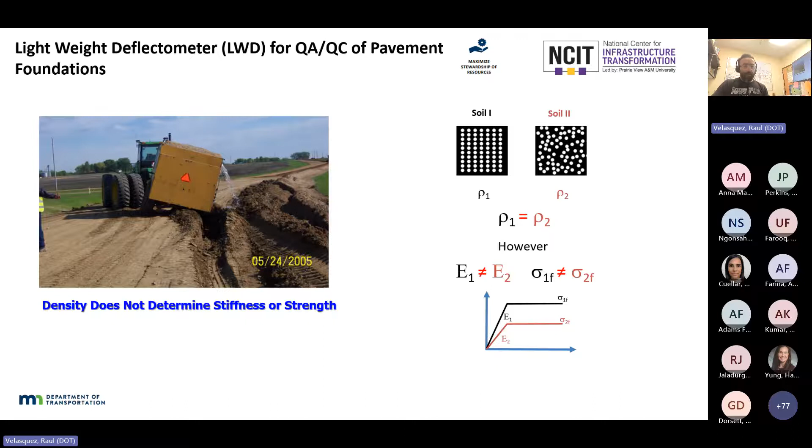Keep in mind that the work done for implementation of LWD was done by many other people before me, some of whom are already retired. I'm just here presenting the results on their behalf - all the amazing work done by my coworkers and previous staff from MnDOT.

So for compaction compliance, after extensive research, we modified specifications for quality assurance of your pavement foundation, which includes your base, sub-base, and subgrade.

So what do we have for compaction compliance in MnDOT? We have specified density, which includes Proctor tests, moisture, sand cone, and nuclear density - the classical old-school tests you do to check your material. We also have quality compaction, related to engineer judgment and experience - visual inspection of your foundation as it's built. Then we have DCP penetration index testing, highlighting the LWD, and test rolling.

For the LWD, during the research development process, there were two methods to assess performance: deflection based and modulus based. We developed charts and parameters so that according to your gradation and moisture content, you have a limit for specific situations and materials. For deflection base, we listed limits for how much deflection we allow.

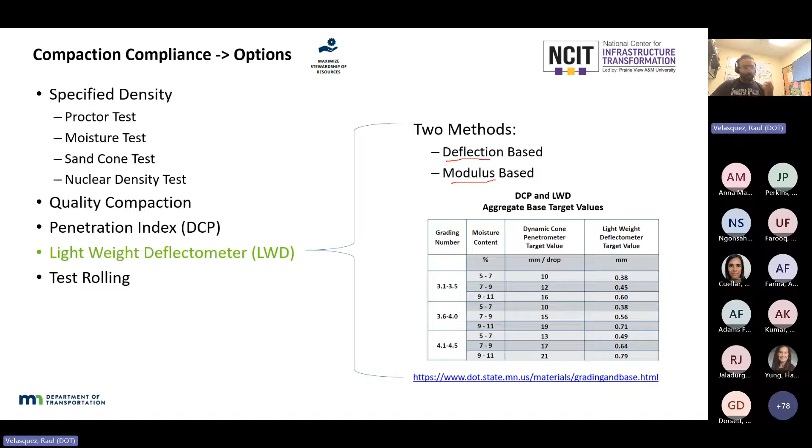However, we noticed as we tried to implement this research that it was a little tricky. Engineers and technicians are used to more rounded numbers, so values like 0.38, 0.71, 0.56 are kind of hard to absorb and comprehend. It was easier to move into modulus base - we have a better grasp of numbers related to stiffness. So we encourage our materials and soil engineers across Minnesota to use modulus base. We still have the option of using deflection base, but we mostly use modulus base.

After many years of testing and experience, we came out with minimum values for elastic modulus based on the LWD - for granular material, clay or clay loam soil, or base or reclaimed material, these are the stiffnesses we target in megapascals. It's pretty straightforward, and so far we've been pretty successful. These numbers match the performance well - we haven't seen any major failures with respect to this simple specification for quality assurance.

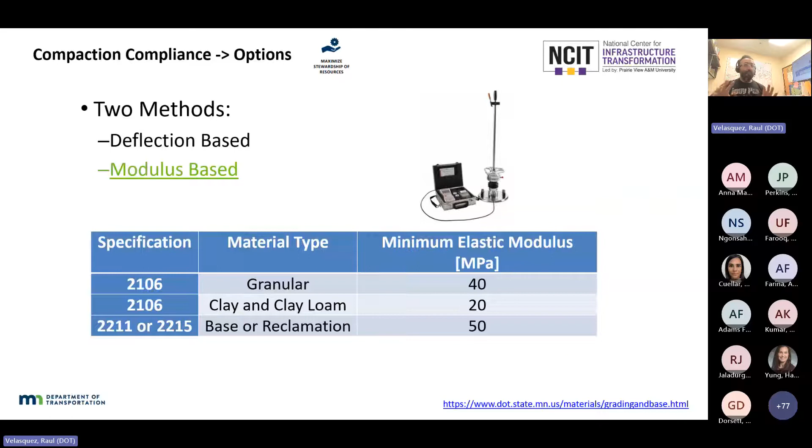So early on during the implementation of this technology, we'd have very few districts using it. Just to give some background, we have 8 districts across Minnesota in MnDOT, and we, with the Office of Materials and Road Research, are part of central office in Metro. We provide technical support to all districts.

Through this implementation process, we also got lucky because manufacturers started miniaturizing the LWD. One of the main issues for implementation was the super heavy device. Some of you probably have experience with it, carrying that. We used to have 2 people carrying this big device to go test it out in the field. So the miniaturization of this device made things much better.

And now we have kind of an exponential use. This chart shows about 22 LWDs all across Minnesota, and I think that number is pretty old. I believe we have way more LWDs now being used.

Some results coming out of the research we completed are the testing constraints. LWD cannot be used when the embankment thickness is less than 1 foot, when your base or reclamation thickness is less than 4 inches, or when you are testing within 3 feet of the water table. That's very important to know as a restriction.

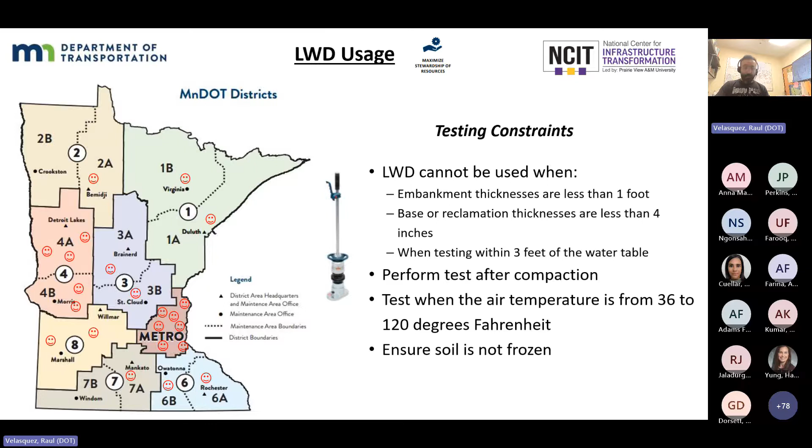One of the objectives of doing this LWD research was to move away from densities. We wanted to avoid the disconnect between the design specification and the construction quality assurance. We wanted to highlight the importance of fundamental engineering properties such as stiffness and strength, and use that to connect with our ME-based design.

We also wanted to be able to better quantify alternative materials. Using just density and classical tools wasn't good enough to really check the performance of innovative materials. And we wanted to be better at rewarding good construction. This tool does a much better job for us than the previous standard technology.

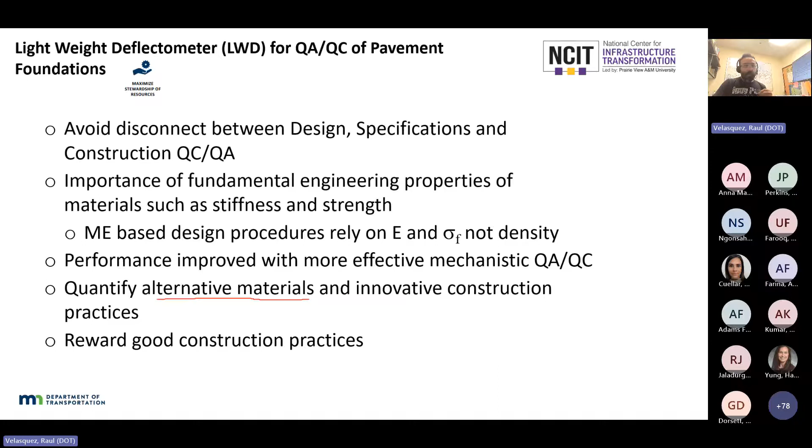So that's it with respect to the simple LWD technology. Now I'm going to move into a little bit more complicated topic, which is assessing stability of slopes across our interstate highway system.

First, I'm going to go through a tool we developed for assessing the vulnerability of slopes based on geomorphology. And what I mean by based on geomorphology is based on assessing the shape of the land. Let me give you some context and examples of why this matters.

Extreme events are becoming more important for us, and why these research projects are super important for MnDOT. Here's an example of what happened in 2012. We had an extreme rain event season in June 2012 that caused major slope failures across Minnesota.

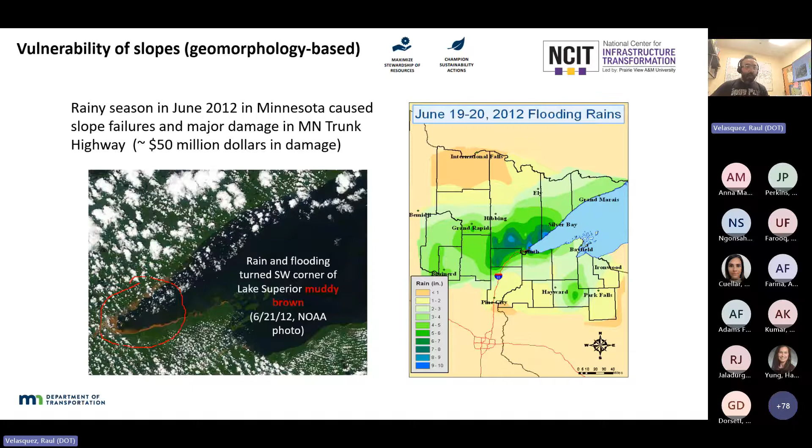It cost about $50 million in damage to repair. You could see even from satellite the damage that occurred. During the rain and flooding, the southwest corner of Lake Superior became muddy and brown. You can see how massive the event was. On June 19 and 20, we had intensity rains of between 7 to 8 inches where we had all these major failures. That just gives you some context of how important this is for us in Minnesota.

This is a photo, an example of one of those failures. Jay Cooke Park, a super popular place to go hiking and vacation with family, had a major failure. We had about 26 road closures on our Trunk Highway system after this event.

It was a major team effort. We had many agencies working together - MnDOT, DNR, DPS, local law enforcement, federal highway, consultants, contractors - working as a team trying to solve and fix this as quickly as possible to get the system back online.

MnDOT's main damage areas were Trunk Highway 210 in Jay Cooke, Thomson, Trunk Highway 23 in Fond du Lac, and Trunk Highway 2 from Proctor to I-35. Those are the major failures that occurred.

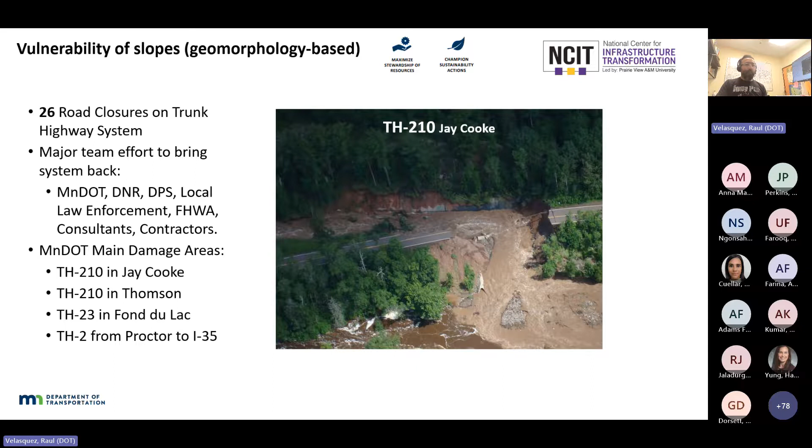That's why it's super important to have a tool that can help us assess the potential problems we have and be proactive about it. That's why we completed this project. We hired WSB as a contractor to help us. The idea behind this geomorphology-based tool for assessing slope stability is to assist engineers to proactively identify and mitigate slope risk along the interstate highways and help during project scoping.

During that planning stage I showed you earlier, in that cycle and long range planning, leadership and planners have to decide how much money to put in 20, 30 years from now so they can proactively start mitigating some of these risky zones. That's part of their long range planning. They've used this information to better estimate budget allocation for the future, and we also use this project to enhance our risk-based assessment of our assets.

In summary, this tool uses a geographic information system, a GIS model, based on geomorphology, the shape of the land, and other key geological and geotechnical parameters to provide a vulnerability rating or probability of failure. This model uses geographic weighted regression, or GWR, to account for local variation in key parameters and minimize bias and uncertainty in the assessment of probability of failure.

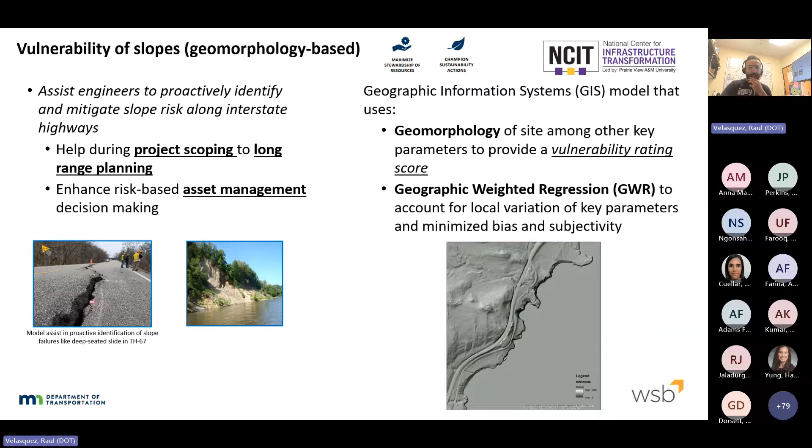So what was the process of developing this model? We have five stages. First, we selected primary input parameters, or what we call vulnerability factors, which I'll list in the next slide, and potential interaction terms. All of them are based on the geomorphology and geology of the region.

Then we checked the vulnerability rating using these preliminary inputs against historical slope failures, to see if these parameters were predicting well enough. After checking that, we revised the final input parameters, keeping which ones were most statistically significant to minimize model complexity. We went back into the field, verified the model, and made further adjustments.

Because Minnesota has very complex geology, we decided to split the project into phases. The project started in 2017 and culminated in 2020. Using colors for the phases, each phase was grouped according to similar geology. Here we listed the parameters important for each phase and region of Minnesota—that was the initial geology, and the final parameters are listed on the right.

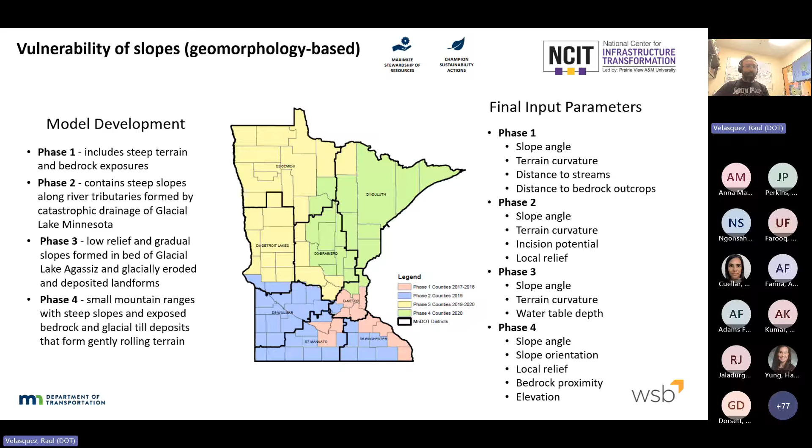So the team went and verified the model. They did some preliminary runs, then went back and looked at history, went into the field, and adjusted those parameters to get a better match with reality. I'll show you an example here on the right—you have a trunk highway.

So we go from satellite photo to elevation, and then from elevation they do the regression analysis and get red for the bad, highly susceptible areas, yellow for not as bad, and green for good. That's an example of a calculation.

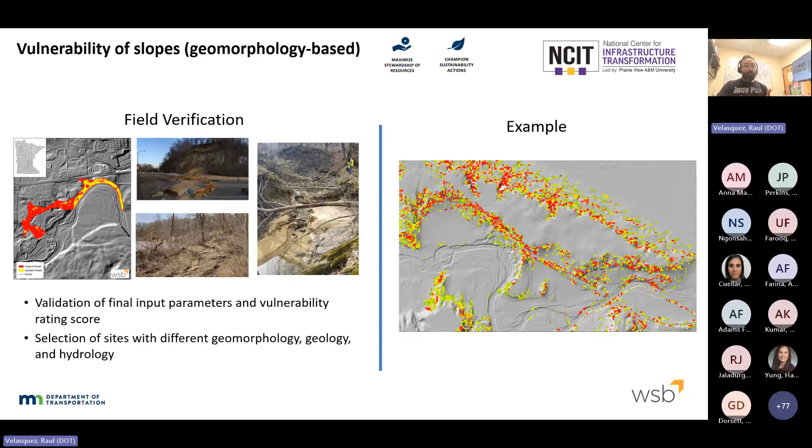After that, we came out with a preliminary risk matrix. Just to remind everybody, risk is the product of how likely your slope or asset is to fail or to meet a requirement. In this case, the likelihood of failure comes from your model output—this geomorphology-based regression model—multiplied by the consequences.

That consequences part is super tricky, and we still need to work more on it. For this project, it was very preliminary, so the consequences part of the matrix was very high level.

If you have a major highway that carries a lot of traffic, that is the only one that communicates to town, that has a high consequence of failure. So that's a critical segment, and therefore it'll be ranked as critical. Then you multiply likelihood of failure times the criticality, and you get those three colors.

From this risk matrix, we created what we call the preliminary management areas. These management areas delineate areas in your GIS map with similar risk ranking, so we can easily manage the risk for failure.

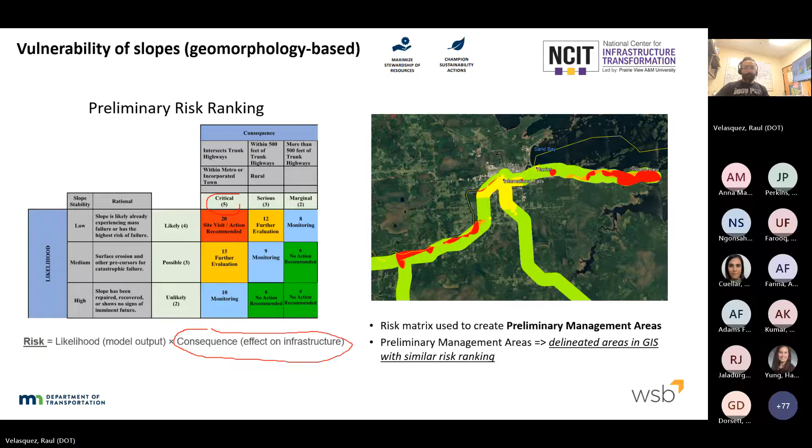Interestingly, materials engineers across the state started using it, especially for regions with more susceptibility for failure. In Trunk Highway 22, we had a couple of slides happening in July 2020, and the materials engineer used this map to detect where the failure was occurring and potential future failure. It was pretty nice - the model was able to capture that.

So in summary, we were very happy with this tool. This GIS model helped us identify, map, and categorize slopes that are vulnerable to failure that can potentially affect MnDOT highway system. It helped us assess the risk during project development. It's time efficient - it's pretty fast.

The geotechnical approach we're going to talk about later can be time consuming and very complicated, so this is very good. This was a very good tool to do first at the network level, a high level analysis. Then we can zoom in, narrow down, and focus on specific critical areas, the red ones - that was pretty efficient.

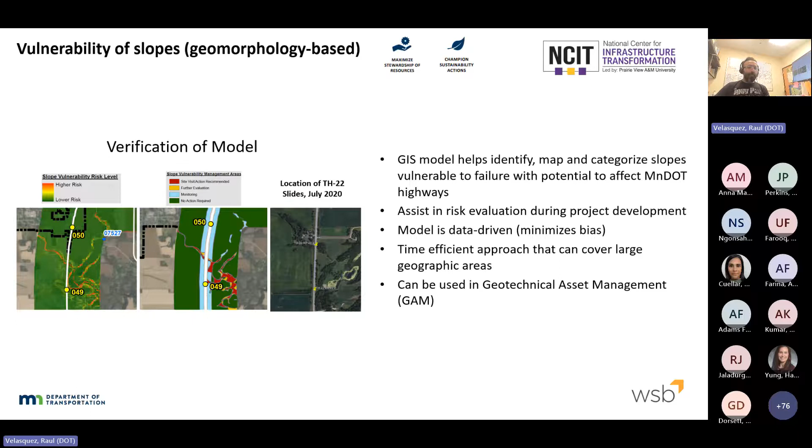The model is data driven, so it minimizes the bias of engineer judgment, which is pretty good too. It's a time efficient approach that can cover large geographic areas - that was also very powerful, covering the whole state. This tool is being used for geotechnical asset management, so it was very good.

The geomorphology-based model has been successfully used. Now there were some remaining tasks to be completed, and that's how the next project, which is geotech-based, came to life.

In addition to being strategic with the big plan, big picture from MnDOT leadership, we also want to develop internal capacity. We want to get up to speed with new available tools in the market as geotechnical engineers in our sections. So we adjusted the work plan and got excited about this project because we're able to accomplish several other objectives with this.

So the motivations for doing this project: first, we address recommendations and gaps from the previous studies that I just showed you. The main concern from the previous project was that we have a lot of red zones - it was pretty unrealistic. It was about 2% of the area across the interstate highway right-of-way areas, about 2% of the whole state showing red.

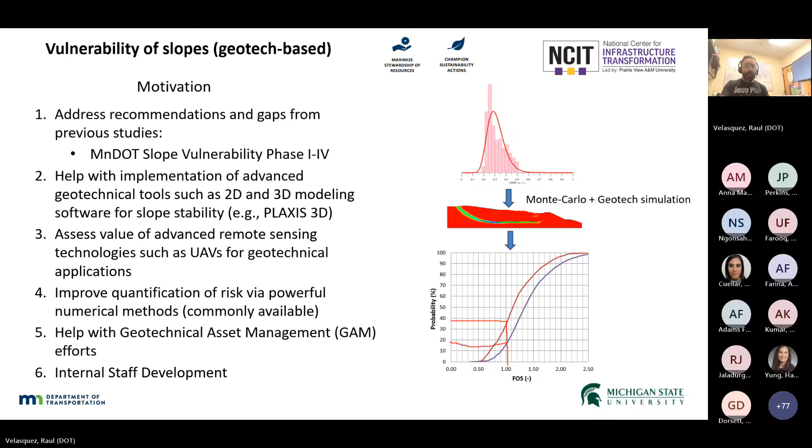This project is ongoing, so I'll briefly show some preliminary results shared by Surya and his team. We have a complicated site up in North Minnesota, in Climax, with two failures occurring—one near a bridge, and another slope failure on what we call the north side. We have several instrumentations installed and a lot of geotechnical exploration. One of the objectives Surya is helping us with is improving this workflow and implementing these advanced technologies.

One of the big barriers is the huge amount of information coming in, not just from sensors but from remote sensing and capturing the digital terrain—the 3D surface of these sites using drones. Here's an example with about 155 million points. Processing that on a laptop is time consuming; you'd need a supercomputer. So we want to implement this properly, and Surya is helping us downsize it to a model accurate enough to provide what we need for our geotechnical analysis.

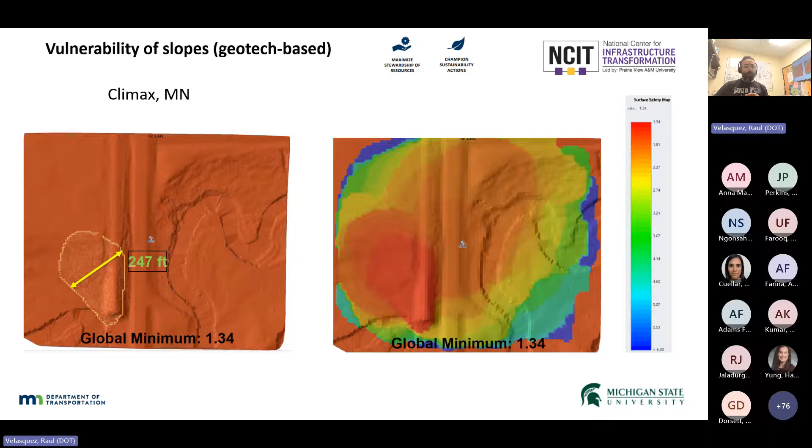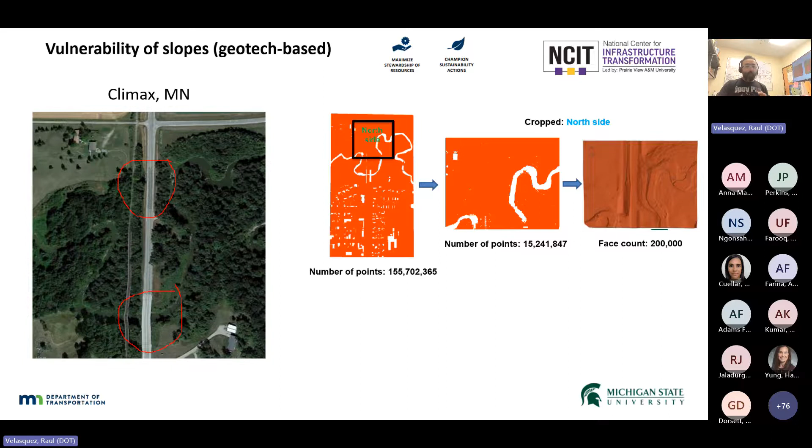Here's an example of that failure—it captured the approximate volume of influence, with contour plots of the risky zones. Another nice thing about this project is that we have a bridge and a railway here, so we have to interact with another agency since there's another asset at risk. This 3D model is helping us explain the failure, which has been puzzling some of our engineers in the bridge and geotechnical offices, because the bridge is moving in a very strange way, and we want to know if this failure is interacting with the one at the north.

So these tools allow us to get better insights. Some examples of Surya's computational stability work let you compute volume—how much volume would be needed if we decided to do some sort of reinforcement—allowing us to nail down quantity computations. We can also go back and forth between 2D and 3D to validate our simulations, since some geotechs feel more comfortable in the 2D space. So that's the progress so far—hopefully in the next few months we'll have more updates. Stay tuned for this specific slope stability project with Michigan.

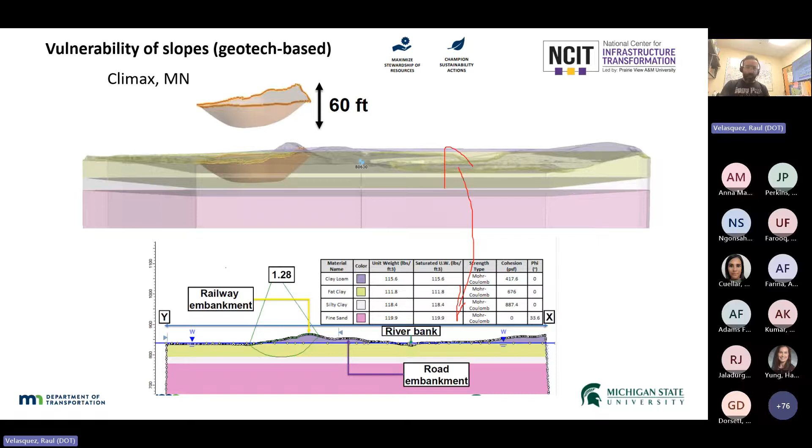All right, now we're going to go back to pavements. I'm going to talk a little bit about pavement foundation uniformity, also known as intelligent compaction. Our previous speaker talked a little bit about it - I think he's a champion, the professor from Portugal on IC. So I don't want to explain much about what the technology is all about. I'm just going to show you some results on how we're trying to help the community with implementation of using IC in pavement foundations.

In order to do that, we are lucky - I would say we're blessed to have a facility, one of a kind in the world: the test pavement facility, MnROAD. Many of you are familiar with it, have visited, have sweat and tears working there. I see some of those people here in the webinar. Built in the 90s, many sensors installed, many experiments - I think it's probably the only cold region facility in the world. You can test your products to the limit, because this facility experiences all kinds of extreme weather.

You have the cold winter of Minnesota, then the hot summer, then this shallow groundwater table, and these ponds that push water into your cross sections. So really it puts your technology to the test. We have great staff helping us there with managing the instrumentation, doing distress surveys, managing the facility. Furthermore, we have one lane which is subjected to real traffic - this is Interstate 94 going west. Minneapolis is right here, St. Cloud is right here, and then we have a closed loop where we have controlled traffic. So it's a pretty powerful facility that we can use for our research.

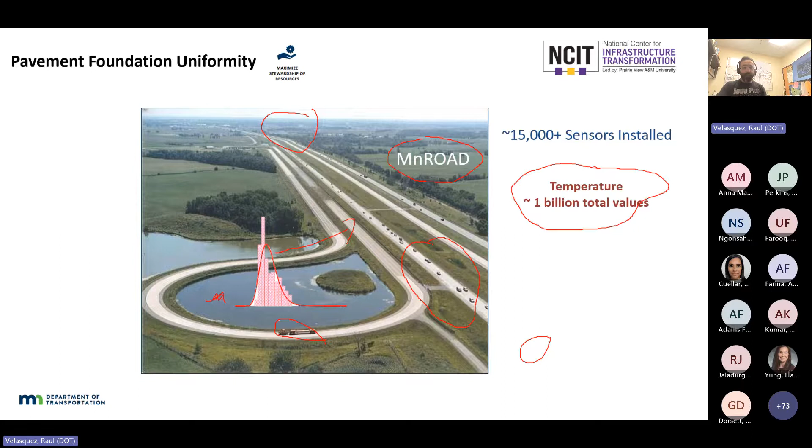So, pavement foundation uniformity - MnDOT has been a champion for IC technology probably since the 80s. Now we are focusing on trying to connect the dots. What I mean is, we tend to do research, do the test - in this case, do the mapping - see some preliminary trends, and then move away. But now we want to go back and look at the performance, and try to connect what happened at the top layers when we do intelligent compaction in your foundation, and how important foundation uniformity is for performance, by looking at uniformity using IC with performance. That's the idea behind this.

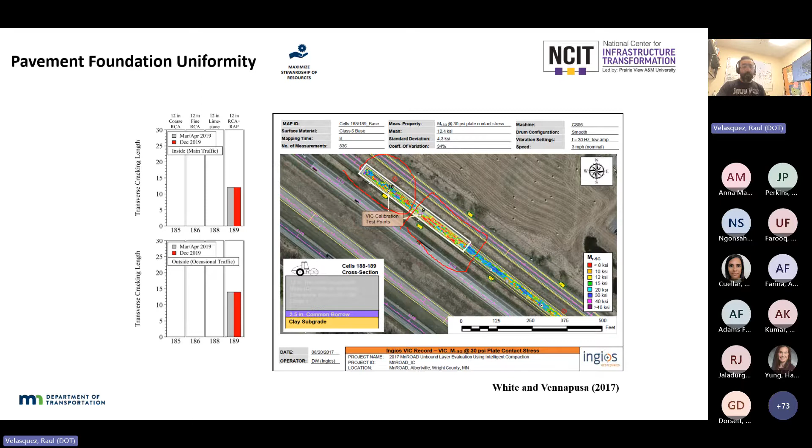Here I'm showing you the mapping. You have cell 185 here and 186 - so about from here to there is 186, 185. Keep in mind, coefficient of variation on average for those two cells was 29% for stiffness after the mapping. Now, let me clear this up and erase. Now you have sections 188 and 189 - 189 is approximately from here to there, and 188 is here. On average, we have a 34% coefficient of variation for both, significantly more than 185, 186. But you can see from the color contours here that variation in 189 is significantly higher, indicating that pavement foundation uniformity has an implication in your distress at the top, and is therefore super important. That was 2019.

Now we have a good collaboration with Michigan State. We have some interns sponsored by NSF who came and did work with us, Dr. Fayyaz Sadiq. We did more analysis on the same data that was collected in 2017.

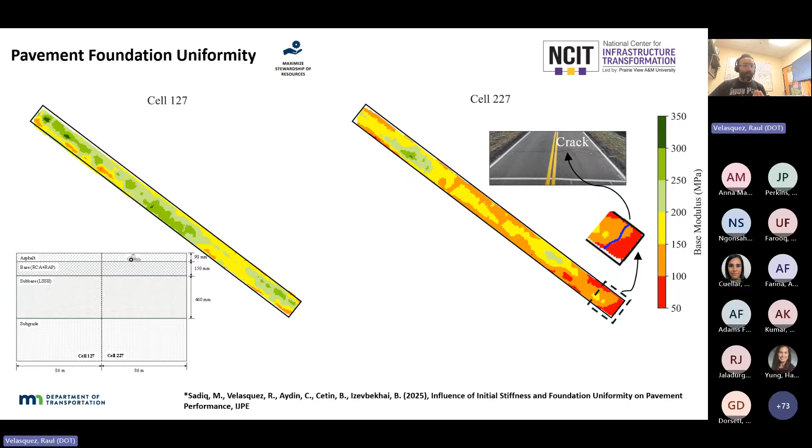Now we see performance in 2024, and we start seeing visual cracks coming up, very large cracks that match where we have large differential in contrast, where we have high non-uniform conditions, high contrast or stiffness variation. Although they have very similar cross sections, the cells that are not performing well are the ones that have non-uniform conditions. So that's very important.

Our experiment showcased the same situation, where we have high contrast in stiffness from mapping, and it's exactly matching where the crack is starting to visually show. So now we're curious, we want to keep looking at these cells and keep analyzing whether wherever we have those contrasts in stiffness is where our distresses are coming up.

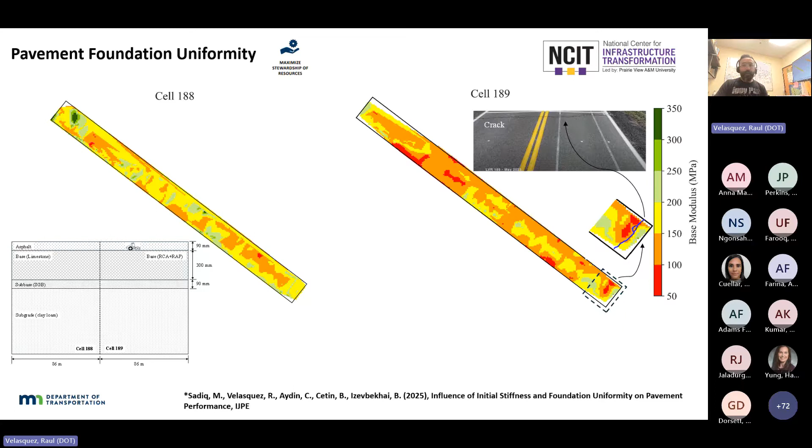So that's in terms of uniformity. And the last project I want to present is on something I'm very excited about recently. We're working together with some other members of our research section on using pavement temperature as a surrogate of pavement performance.

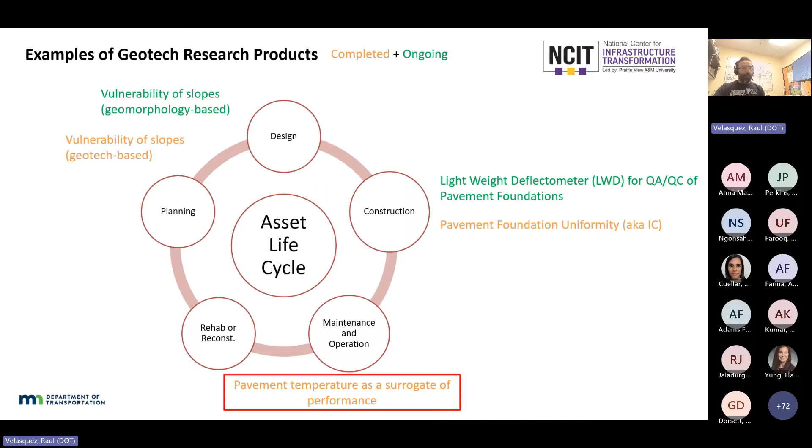As pavement engineers, we tend to focus on three mechanisms that affect our pavement system: stress strain, which is a question of equilibrium; then the heat transfer problem when temperature changes; and then your flow, moisture flow, water flow. We tend to solve these three mechanisms independently, although they are coupled and influence each other.

We tend to indirectly account for that when we compute our stiffnesses for our soil or asphalt material, to account for the effect of temperature. If it's hotter, my asphalt will be less stiff, and so forth. We indirectly include the effect of moisture and so forth, but we don't tend to look at everything more holistically.

So the idea behind this is understanding that all of those three systems or mechanisms are interconnected. If you have a crack in your road, that's going to facilitate the seepage of water coming from rain. It's going to help facilitate air entry, and therefore it's going to change your temperature. So we're looking for signatures.

We want to look at simple signatures that tell us when a pavement is getting sick, when a pavement is going towards poor performing. So it's leveraging what I showed you before. We have billions of data points of temperature data, leveraging that information to try to determine baselines of a healthy pavement, and then see how those signatures deviate.

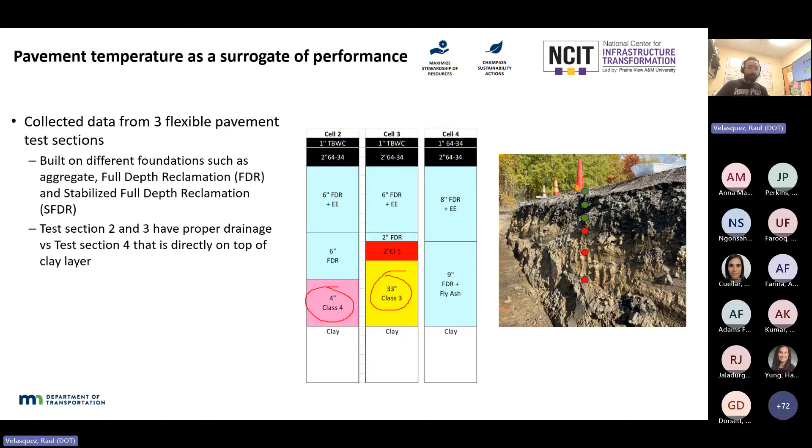But for cell 2 and 3, we have drainage, a good layer for drainage purposes so water can flow. Cell 4 didn't have that. Cell 4 has the full depth reclamation right on top of the clay. So keep that in mind as you see those results I show you. Cell 4 didn't have a drainage system.

So then we start looking at simple data analysis of this big large data set from temperatures. Here I'm showing you this thermocouple tree. We have these three green sensors at the asphalt layer, and then these red ones in the foundation. Just showing you the sensors at the top, in the asphalt layer.

So what we're trying to do is build these distributions, these signatures that we expect from healthy pavements that are recently constructed, and see with time how these expectations deviate as we have failures. Failures due to environmental conditions, failures due to traffic, or failures due to malfunction of the sensor. We have seen that too, which is pretty cool.

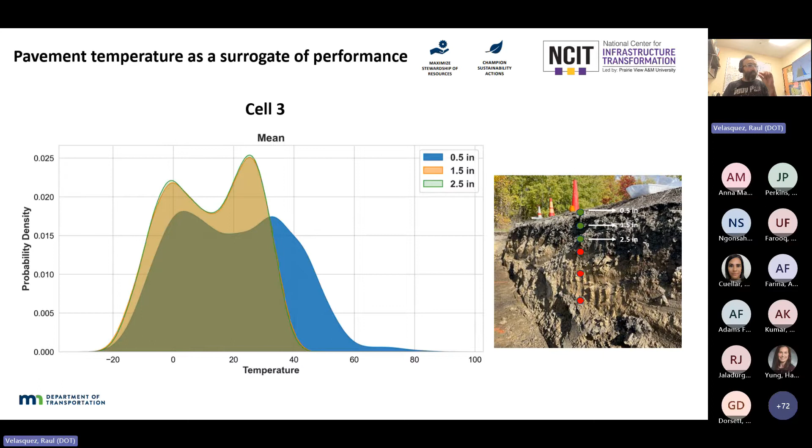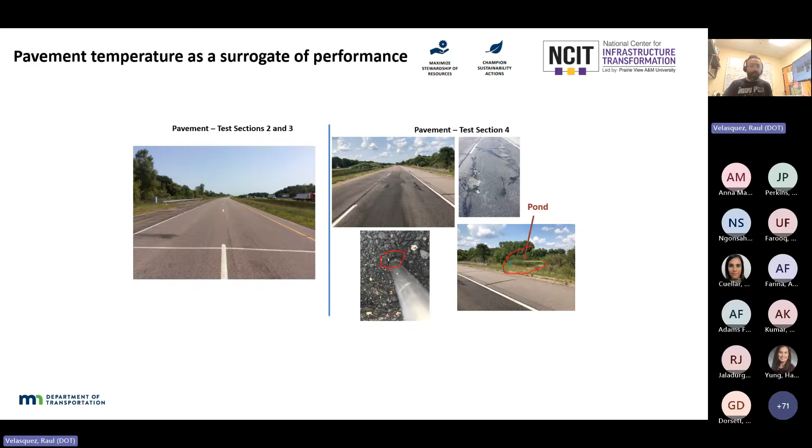Here showing you sections 2 and 3, not much distress, looking pretty nice. Section 4 shows signs of distress. When we were doing field investigation with DCP, we see the pore pressure, water pore pressure coming up, bubbles coming up. And of course we have a pond right next to it. Furthermore, we don't have a drainage system, so it was obvious we're going to have that issue. But it's very nice that we see it in the temperature data. The temperature is telling us there are some issues really in the foundation of this cell.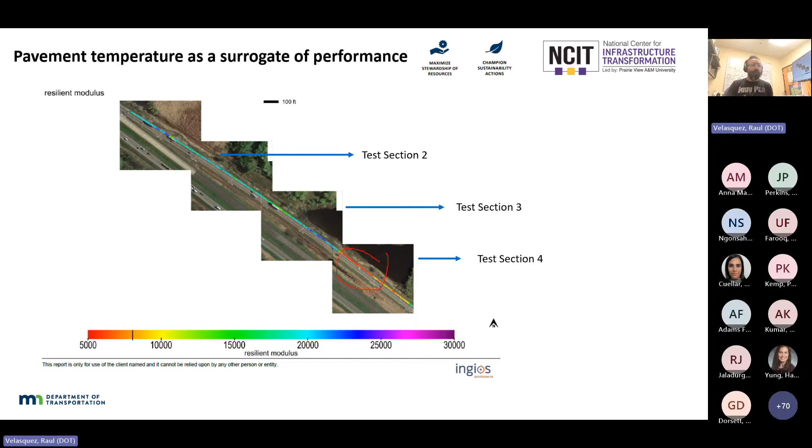So what we're looking for here is to proactively try to address the issue before it becomes too bad.

I'm gonna go very quickly. How many more do we have, like 10 minutes, right? Hopefully, let's see, it's until 2:30, right? Yes, it's until 2:30, Dr. Velasquez. Okay, I'm gonna go fast. I promised 35 minutes, but I got too excited. I'm gonna go as fast as possible.

Now we have concrete, a very similar situation. We're looking for signatures. We have two pavements, cell 13 and cell 12. Both very similar concrete pavements, thickness very similar, a little bit different geometry, but cell 12 has edge drains while cell 13 didn't have edge drains. From the signatures, interesting enough, the mean as a statistical parameter was not giving us much, because concrete is more stiff, more robust. But standard deviation started giving us the information that we wanted.

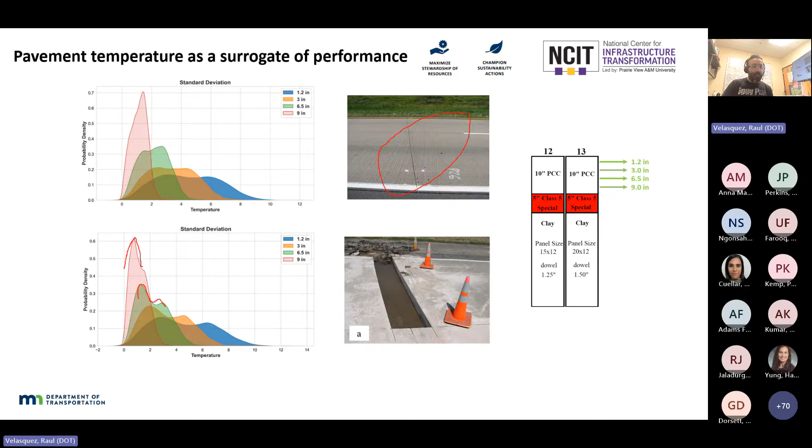Deviation in the standard deviation distribution was telling us that the pavement was getting some issues. You can see here we start to see bimodal distributions. This is cell 13, showing these kind of peaks. I'm going to zoom in more. I have another slide showing you that it's different from cell 12, highlighting that problem.

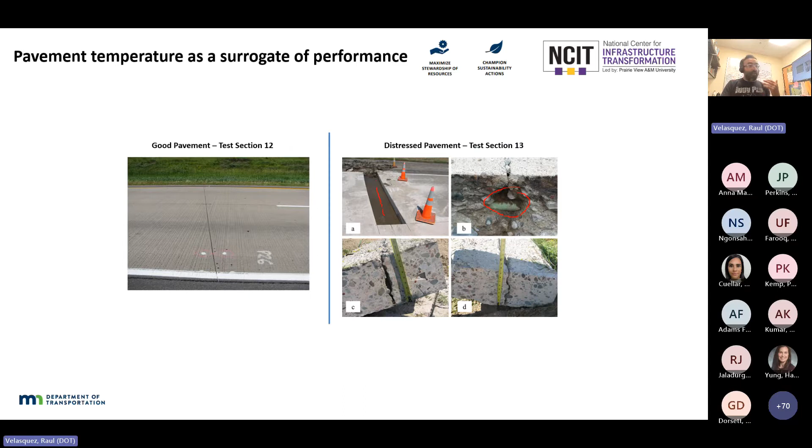What's very interesting too is that those two cells, by our current standards of roughness and IRI, were performing very well. We didn't see any signs of issues with faulting or IRI for cells 12 and 13. But after we did inspection and cuts, cell 12 was looking good, while cell 13's dowels showed issues with erosion, water ponding, and drainage problems. Again, IRI and other pavement condition assessments were not giving us the information that something was about to happen, but this distribution analysis of our signatures was showing us.

This is the mean average distribution in the concrete pavement slab. The mean was showing that both cells were pretty good, but the standard deviation was showing this bimodal distribution, and cell 13 is the one with drainage issues. So variation was telling us you may have some internal issues, so be very careful, be proactive. This is what we're looking for here, trying to be proactive and finding these signatures for asset management of pavements.

Now, as closing remarks, I want to give you some lessons learned on implementation of geotech research.

We got this information from a previous effort through the National Road Research Alliance. About a year ago, we had a conference, and we worked extensively with Dr. Sharon Iden on doing interviews with members of the alliance that collected their thoughts. This information is super important and useful for us to be successful at continuing implementation of geotech research, and this applies to any kind of research. We collected information from agencies, DOTs, academia, and industry.

So what are the thoughts that we got? Some of these are obvious, but it's important to keep emphasizing because we keep relearning and understanding these issues, and we'll hopefully start removing some of these barriers. Agency members - that doesn't just mean we have about, I forgot, maybe 10 DOTs part of the NRRA. I'll have to go double check, but we keep growing in terms of the alliance, so this doesn't just mean that.

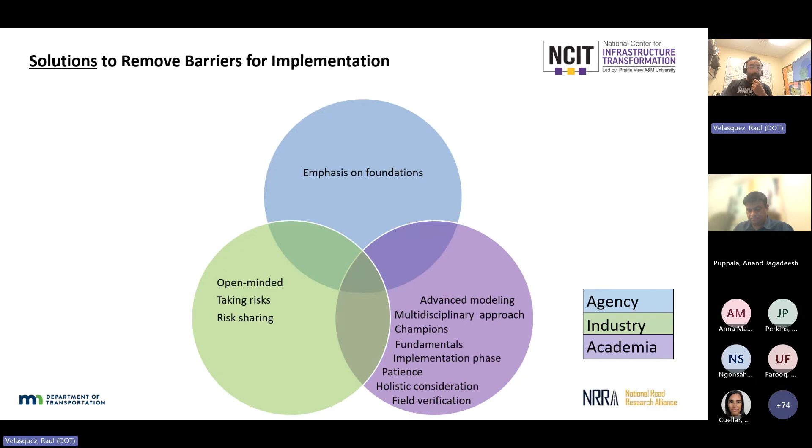Solutions: we have to spread the word, improve collaboration, and mutual learning. That's from all three hats.

Agency and industry want to highlight that we need to do better research at showcasing the benefits. Industry would like all stakeholders to be more open-minded and to share the risk. Industry tends to take most of the risk, so they would like to share it.

Academia has other good points: field verification, be more holistic, be patient - that's a very good one. Include an implementation phase, go back to fundamentals - I really like that one.

And this one I cannot emphasize more - champions. This is one of the most important things, and I'm probably biased towards LWD's success because we have a very good champion throughout decades, and that's why LWD was implemented properly here. Champions are key. Multidisciplinary approach, include advanced modeling - don't be afraid of some of the fancy computational tools we have available now.

Guidelines, design engineers, practitioners, specifications. And final thoughts - additional thoughts on implementation. These are personal, not coming from the NRRA interviews.

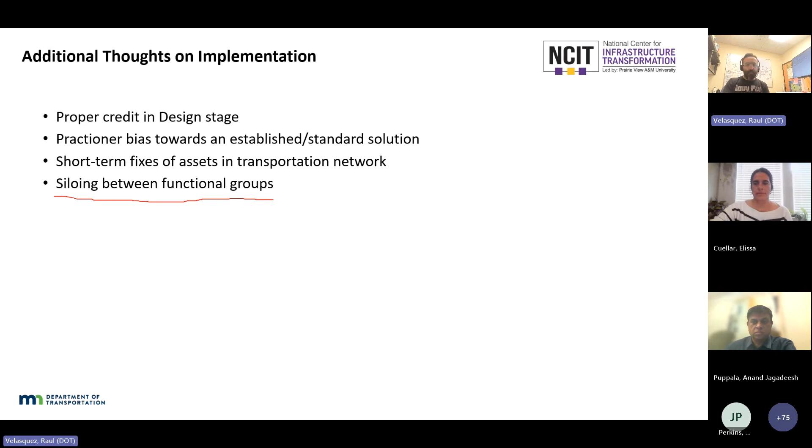I want to acknowledge the Office of Materials and Road Research leadership and staff, especially research section staff, retired and former MnDOT employees. Some of them were involved in projects that are no longer part of MnDOT, including MnROAD Operations, the NRRA, WSB for the geomorphology-based project, MSU for the geotech vulnerable slope stability approach, and Ingios and UTEP for the IC at MnROAD. And with that, I have only one minute for questions.

That's good, I don't have a lot of time for questions. I did it on purpose. I'm just kidding.

Thank you, Raul, thank you so much. It's really a comprehensive presentation covering various aspects of geotechnical works at MnDOT. I have a couple of questions posted here, maybe I'll take those too.

The first one is, I was wondering if you could elaborate on the instrumentation used at the Climax, Minnesota site. How was displacement of bridge piers and foundation measured? Was there a trend between the displacement and pore pressure measurements or precipitation data?

Good question. So we have shape arrays installed in several locations to track horizontal displacement of the slide. We really wanted to find, we have that shear failure, we have slickensided conditions, and with those shape arrays we really wanted to nail down what was the zone of shearing.